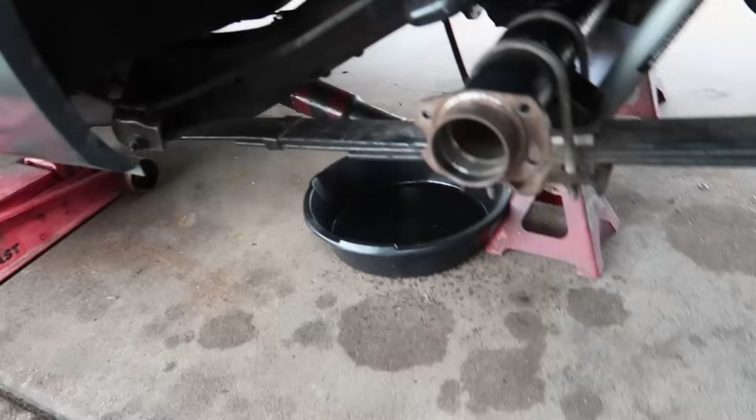In the last video we got this rear end bolted up in here temporarily, because we do still need to assemble it, but this is the reason why. I want the suspension compressed. So these are the shocks we're gonna be running, and this is the bracket we're running. I now have the axles sitting on jack stands, so the weight of the vehicle is actually being supported by the leaf springs and the rear end, just to make sure we get accurate measurements here.

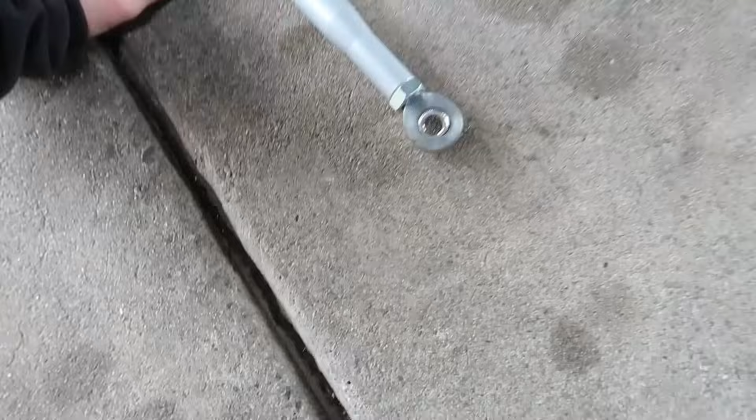So I've actually got a couple of traction bars here. These are from Max Speeding Rods, bro. They're actually for an EG Civic, but they're getting repurposed. So we need to make our brackets to go to the bottom of the U-bolt bracket here, and then it's got to span up to a bracket we need to fabricate that's going to bolt onto the leaf spring itself. I have less than $90 worth of material here.

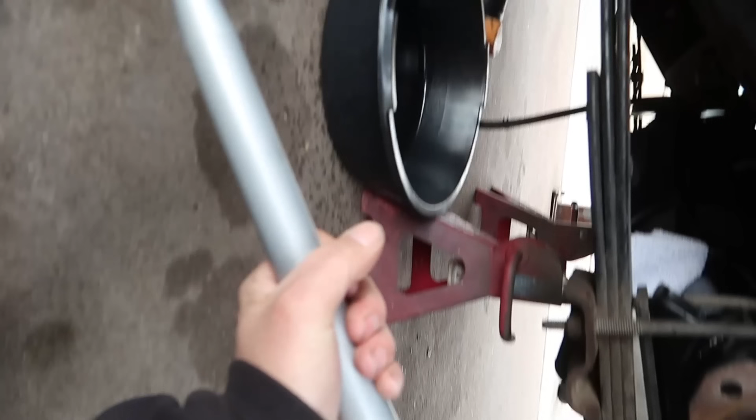Of course, I didn't have to purchase these because I actually had these guys sitting on the shelf. If I did have to purchase this, it would be just slightly over $100. So we've got a lot of fabricating, measuring, cutting, welding, and stuff to do. My main focus at the moment is I want to get that bracket fabricated. What do you guys think of my drawing, man? It's not too bad, huh? The whiteboard in the garage is most certainly a dope idea, one of the better ideas I've had in a long time.

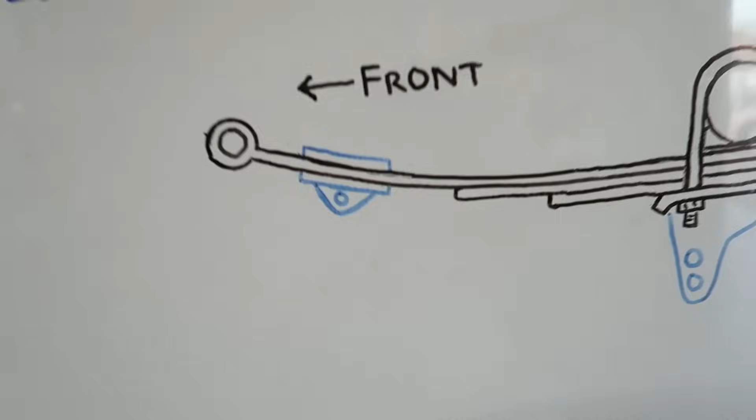All right, so first thing I'm gonna work on is kind of a simple portion. We're gonna start off easy. I'm going to erase this section right here. So the only thing we need to make are two plates that are going to stack on the top and on the bottom of the leaf spring, sandwiching the leaf spring in between it. We need to cut 4 pieces of metal and drill a bunch of holes, but in order to do so, we gotta do a whole bunch of measuring.

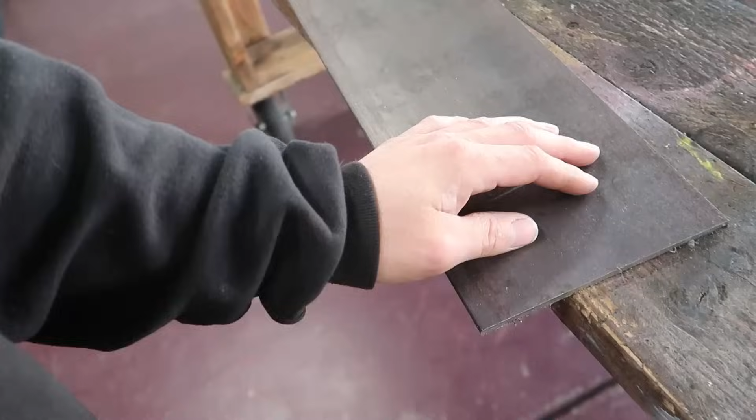So for this, we're gonna be using 6-inch flat bar. This is 6 inches wide and it is a quarter of an inch thick, solid steel. First cut! Nice, now only 3 more. Whoa, god damn it, that was hot. There's our first pieces cut.

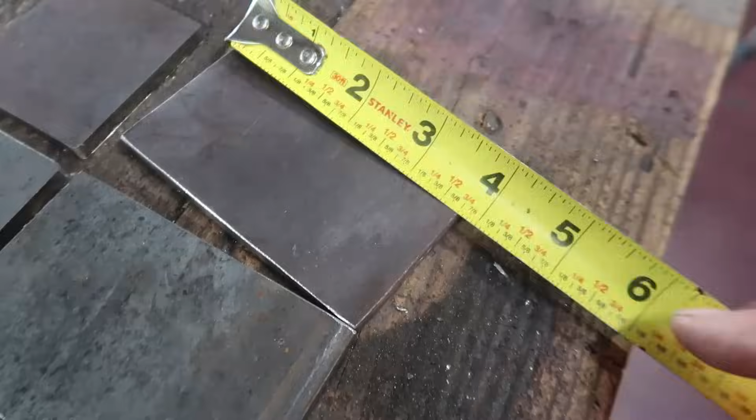These are 2.5 inches wide. I made them the same width as the leaf spring, no reason why, I just wanted to. So 2.5 by 3 3/4. Since I cut this the same width as the leaf spring, it'll make a really good representation. Oh my God, I almost dropped it on my toe. It'll make a really good representation of a leaf spring up here. So this is the same width as the leaf spring.

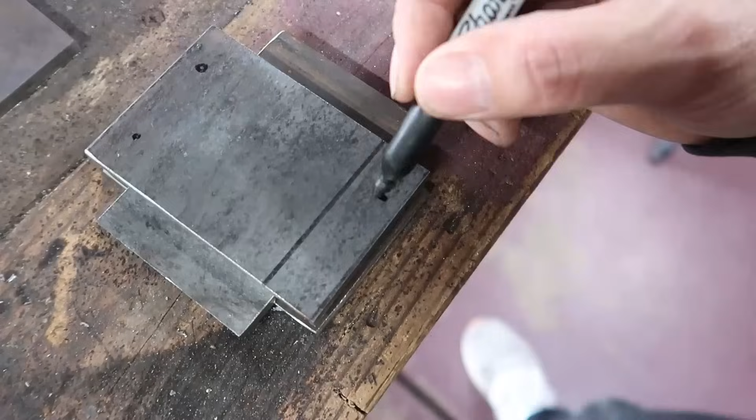These are going to sandwich onto the leaf spring like this, and we need to put 4 bolts through it. So 1, 2, 3, 4, just like so. So that's what I need to do next, figure out exactly where to drill my holes. I want to drill the holes so that when these bolts go through, they're right against that leaf spring. That'll limit the amount this is capable of moving side to side. If we get these holes nice and tight against the leaf spring, that'll add a little more rigidity so this thing isn't wandering around, because you don't want it to wander.

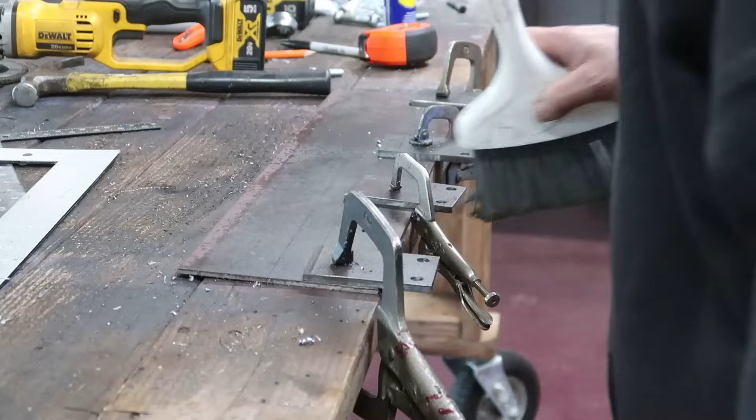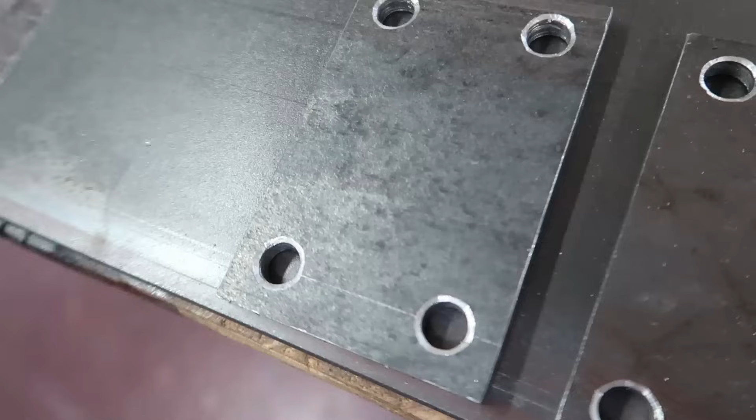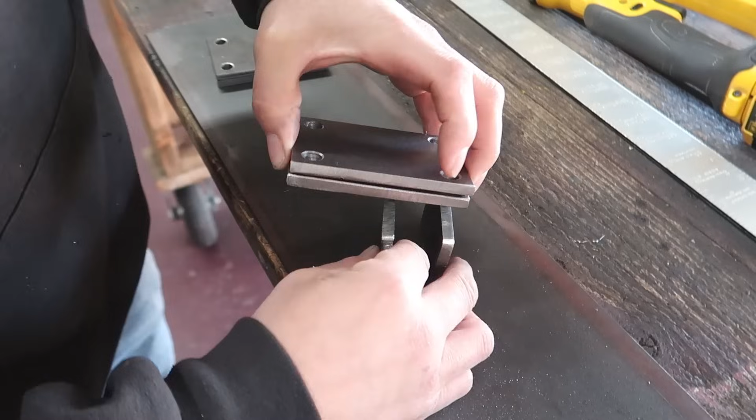Alright, so the top and the bottom portion of this bracket is now completed. We need to work on the part that's going to come down like this, and it's going to have a hole in it. This is going to be a pivoting point. So one of these is going to go on the top of the leaf spring, one's going to go on the bottom, and then they're going to bolt together. On the bottom portion we're going to need a bracket, something like this, that the next bracket we make is going to have to fit inside of, and it has to pivot.

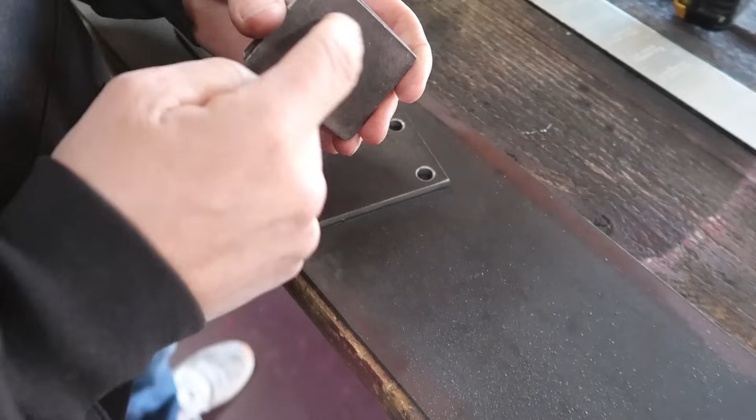So basically like that. We got to get these pieces trimmed, we got to drill holes, and we got to get them welded on here in the correct distance apart.

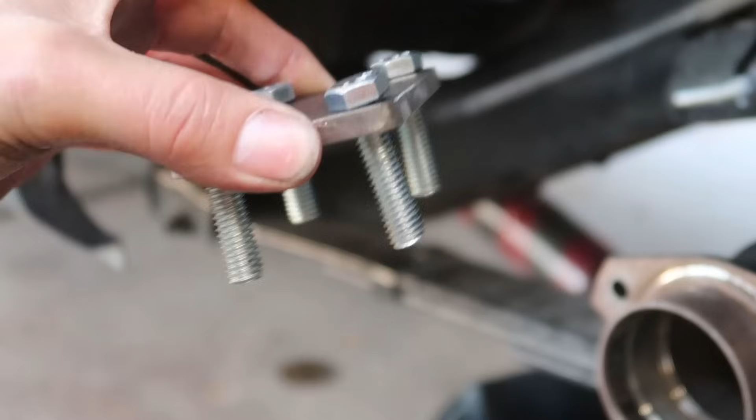Well, there it is, man. Our first brackets are done. This is the easiest of the 3 brackets that we have to fabricate here.

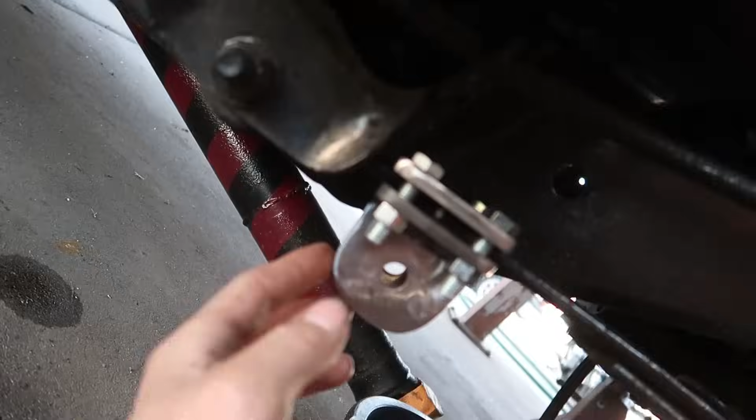So I want to mention before somebody puts it in the comments, I do have grade 8 hardware. It's these zinc coated ones right here, and I also have nylon locking nuts that's going to go on there, as well as whenever we get this all finalized, I'm going to go ahead and cut the extra threads off.

This is basically just mock-up hardware, but now we've actually got to get the Blazer all jacked up and supported by the frame once again, because now I need to pull these brackets out. And yes, I know, the ones that we just installed, but that's the reason why. I wanted to make sure to get them in so I can pull some measurements and everything.

I had to make sure that these bars were going to be long enough and the placement that we need to put the holes. Since we got that all mocked up, that made it to where I was capable of figuring out exactly where I needed to place this lower bracket.

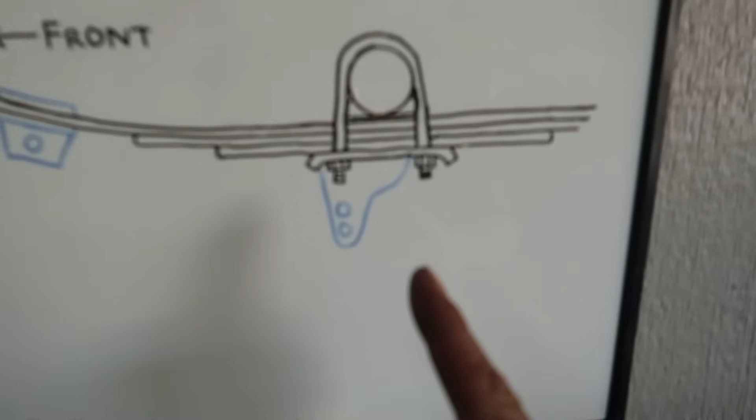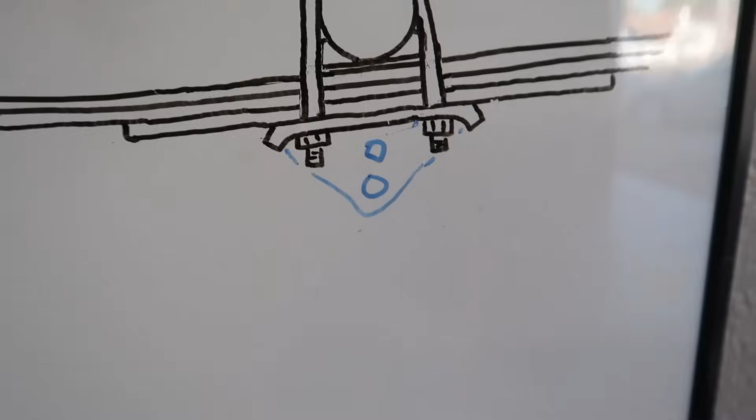So I wasn't sure if I wanted the holes to be like kind of where I have them drawn on this picture, or if I wanted it to be something a little bit more like that, to where the holes would have been more centered.

It really doesn't matter where it is you have the holes. Either way, it's going to do the same exact thing, but given the length of the bar is the reason why I think I'm gonna need to do something a little bit more like what I originally had drawn, so the holes are moved a little bit more closer to the front.

All right, pulling some really quick measurements. We need to bring this bracket down as far as we possibly can, but you also run into a problem. You cannot go outside of your scrub line.

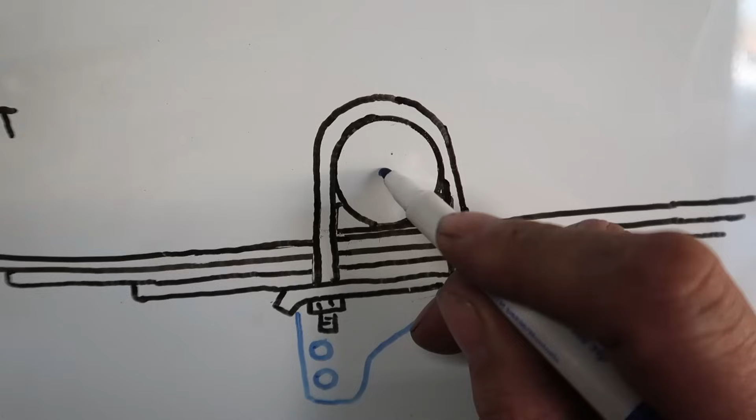So your scrub line, this is the center point of your wheel whenever your wheel is attached on here. So let's just draw kind of a dotted line representing a wheel, right? I'm gonna fill that in a little bit more so you can see it. So that's your tire. Let's say this is the actual wheel.

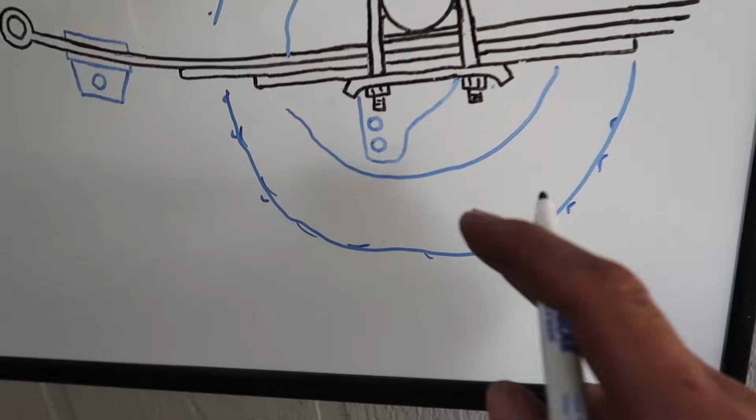If you have a flat tire, you were to lose your air pressure, you don't want this bracket to be hanging down anything lower than the edge of your wheel. So if you were to have a blowout and then all of a sudden that bracket touches the ground, that's extremely dangerous, because it'd be kind of like hitting the brakes on one side, or it could potentially rip your entire rear end out.

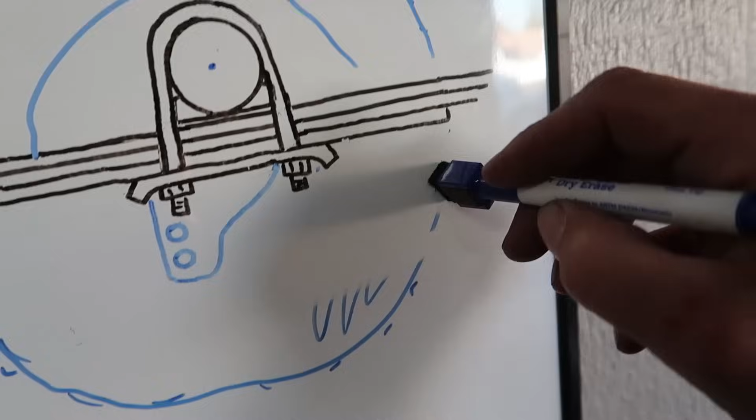A lot of times whenever you go to the track, tech will actually look underneath your vehicle. I would imagine it's mostly for rear wheel drive vehicles, and check and make sure that any traction bar that you have back there is not hanging lower than your scrub line, because it's a pretty serious thing.

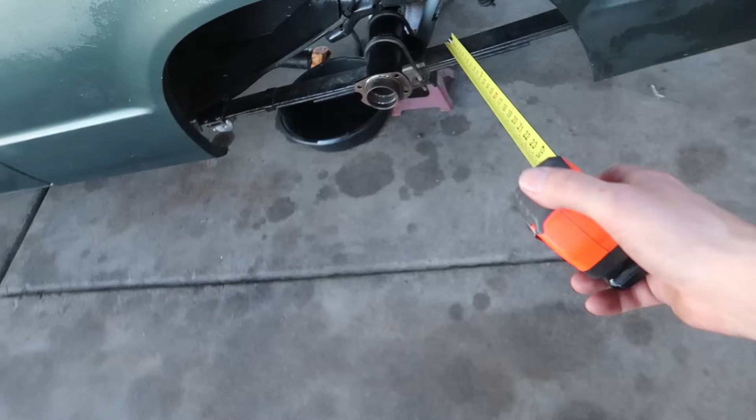So the wheels that I currently have on the Blazer are 15s. I don't ever plan on running anything larger or smaller than a 15 in the back, so I'm gonna go off of that measurement. And also, if you didn't know, if you have a 15-inch wheel, it actually measures out to be 16 inches in diameter.

So you put that on the edge on this side and you come over here, bam, look at that, we got 16s, man. But if you look at the tire, it's 15. If you didn't know that, you're welcome. Go out there and measure your wheels, bro. I bet you they are an inch bigger than what you thought.

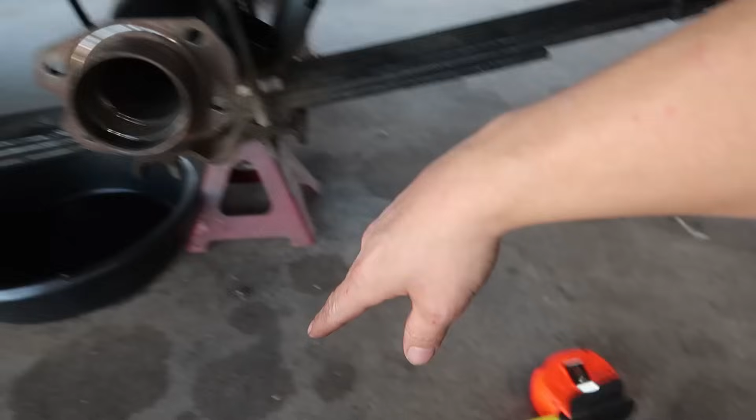I'm not gonna go over all this once again, but I did measure the diameter of the pipe. I cut it in half, minus that from my measurement, and then brought the tape measure down. Long story short, our bracket that's gotta hang down right here is capable of safely coming down 3 1/4 of an inch from this bottom edge right here.

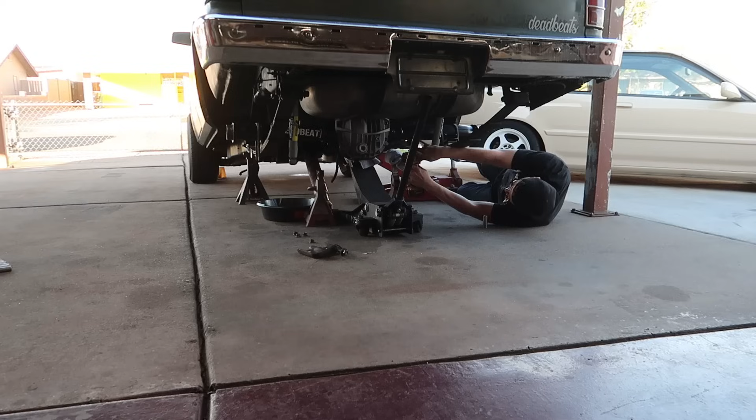So I went ahead and I got it sandblasted, took all the old paint and dirt and everything off of it, got it down to bare metal. I've already started trying to mark out the center of this.

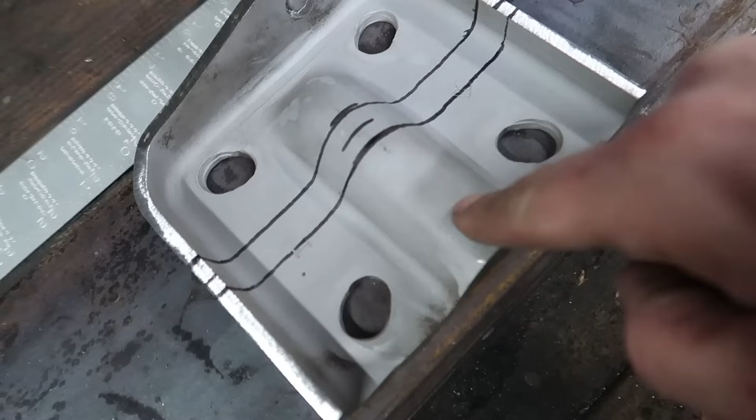So this is going to be the same concept as the bracket we already made. So basically this flat portion is the U-bolt bracket. Now we have to fabricate these 2 sections right here. Of course, they're going to be a lot larger, shaped differently, but it's the same concept. But the gap that's in between them needs to be 5/8 of an inch, which is this width right here.

So basically, the brackets that we're making right here is going to do what I have set up right here. It's going to go on each side of the heim joint.

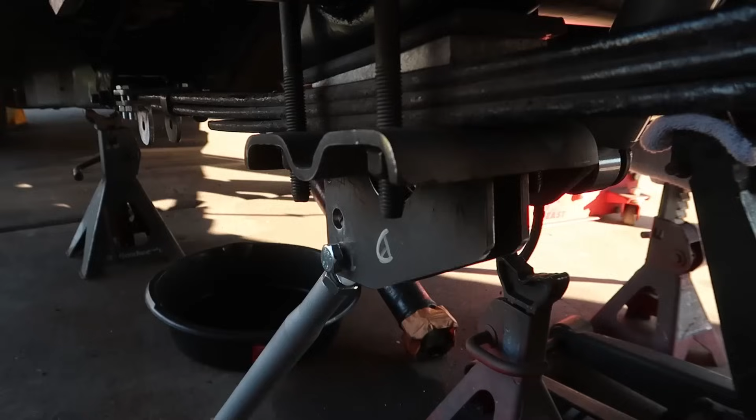U-bolt brackets are freaking done, man. Now we get to move on to what I think is probably gonna be the most difficult bracket we have to make.

It's gonna be the one that involves the most cutting, measuring, and drilling. So this right here is actually our pivoting point. Back here is where our bar connects to the rear axle. This is basically the control, I would call it.

I don't know, I'm trying to give this stuff names. So we got our control bracket done, we got our pivoting bracket done. Now we gotta get, what am I gonna call this? We gotta get the business bracket done? I don't freaking know, dude. I'm done giving names.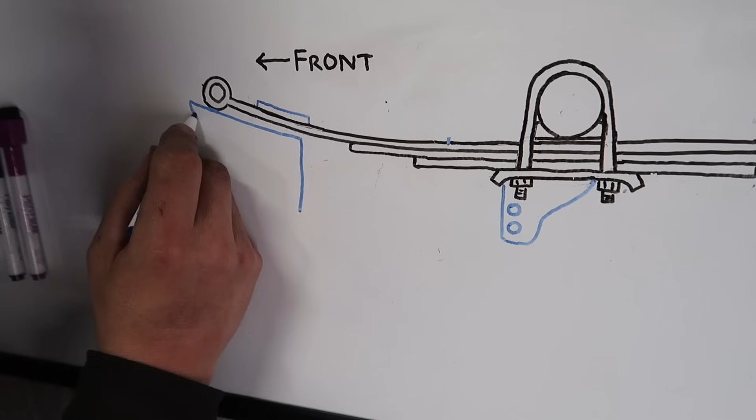I'm just gonna erase this to get it out of our way for the time being. You guys know what that bracket looks like. So now we need to make a portion that's going to extend up here to where the leaf spring bolts. This is going to run straight back to where our pivoting point is, and then come down into an L shape. We gotta make sure it's got enough girth to it to be nice and strong, something basically like this. So then there's going to be a hole right here, and our pivoting bracket is going to attach there at our hole.

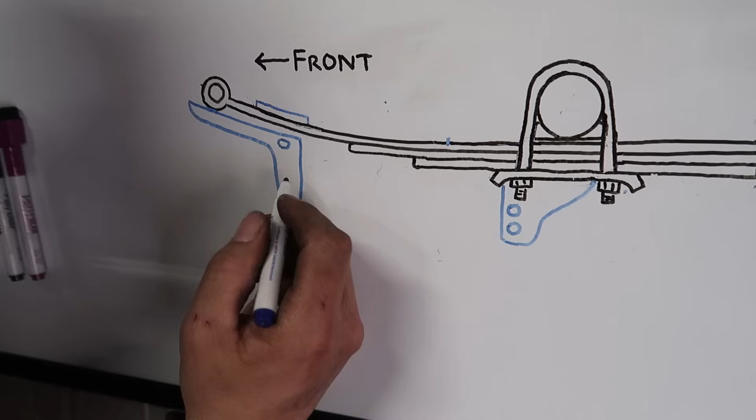And then down here we are going to add holes for our bar. That's where our bar is going to actually connect. So this is what makes everything happen. This is what makes the business happen, man. We're really close, and I'm not gonna lie, I'm really excited to get this done. So let's just freaking get right into it.

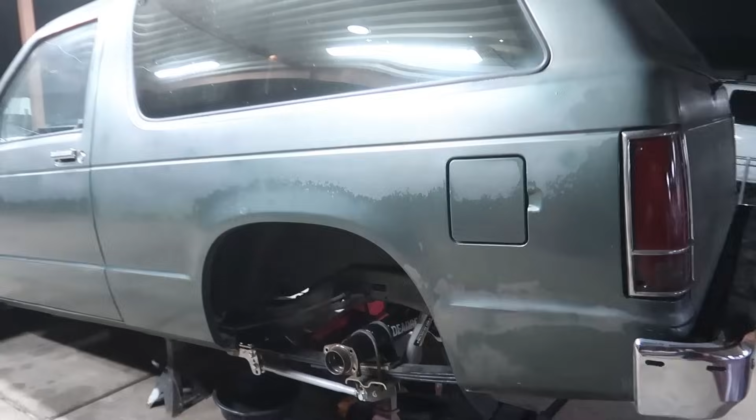Traction bars are freaking done, man. You guys want to know this, but this took me like 3 days to do. Between each bracket, cutting and measuring and all that crazy stuff, it takes time. If I had a water jet, I probably would have gotten this done in one day. But anyhow, they definitely came out dope.

For those of you who have been telling me to get a set of Caltracs, if you look at this, it's definitely a different design than what I've seen from Caltrac. I don't know if Calvert Racing, which is Caltrac for those who don't know, makes a traction bar similar to this style or not. The traditional Caltrac bars actually have the triangle and the bracket goes over here.

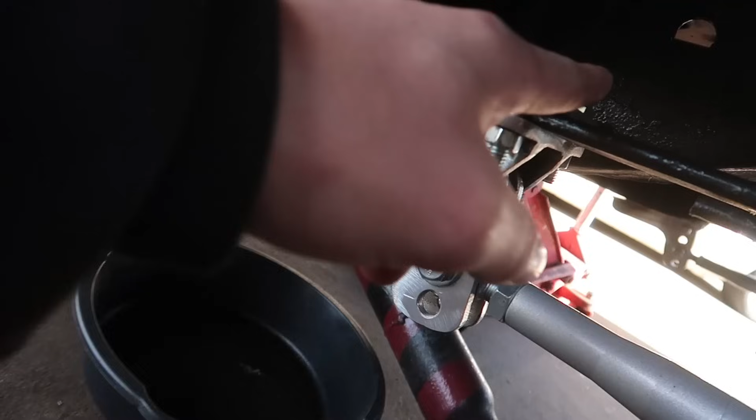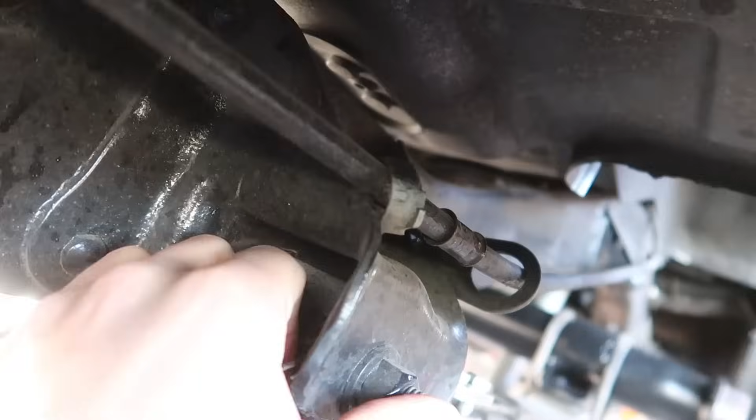Anyhow, I cannot fit that style bracket because it has to go on each side of the spring perch, or the mount for the leaf spring. So if you see on this side, it's wide open, I would be able to fit it. But where the Blazer is different, this bolt actually goes through the bracket on this side and then into the frame. So the other side of this mounting point for the leaf spring is completely boxed in by my frame.

As you can see, there's nowhere to put that other triangle. You gotta have one on both sides. Where if it was on a truck, it's completely different.

For a lot of you guys who are new to the channel, you probably don't even know that I have an S10 truck as well. You'd have to go back and check some of my older videos. I bought this as a running and driving truck, tore it all down with the idea of putting LS and everything into it, completely tore it down to the frame. We've resprayed the frame and everything. I'm not gonna get all into it. If you want to check that out, all the older videos are on my channel down below.

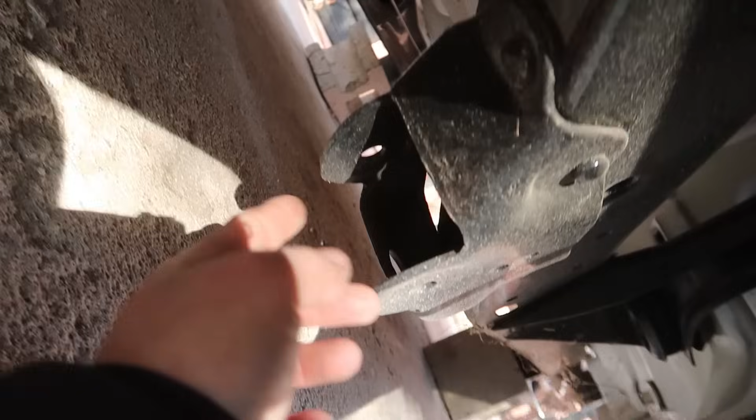So we will be picking back up on this thing in the future, but I want this to be like the all-out race truck. So if you come out here to the truck and look at its leaf spring mount, do you see how it's completely wide open? On both sides you can get that triangle shaped bracket where you cannot do that on the Blazer. And then also, this is a really flat surface. The Blazer's flares up at the front where I would have to cut that off.

I don't know, man, it was just obvious to me that the traditional style Caltrac bars was not going to fit on the Blazer. All right guys, I'm going to give you a brief explanation really quick of my take on wheel hop and how it is that this traction bar is going to actually improve not only the traction but eliminate wheel hop as well.

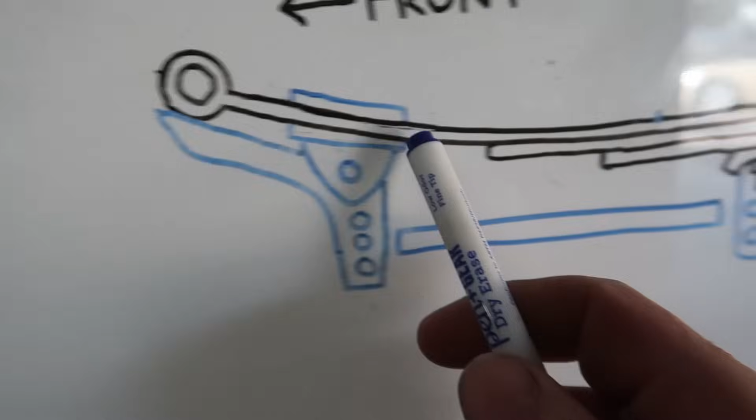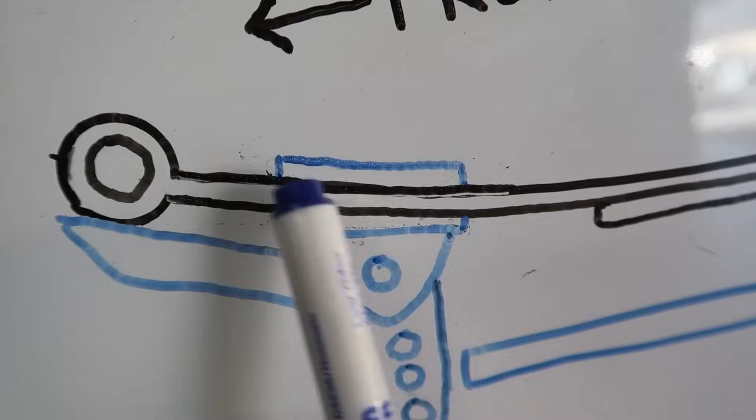So not paying attention to the traction bar at all, just look at the leaf spring that I actually have drawn up here. The section right here where that second leaf spring ends up until the center hole right here where it mounts, that single piece of leaf spring that comes up, that section right there actually will bend under load.

Whenever you're doing a burnout or try to take off fast, if your tire actually grips the road, what the axle wants to do is spin. The axle won't actually spin, but it will rock like this. When it does that, something has to give.

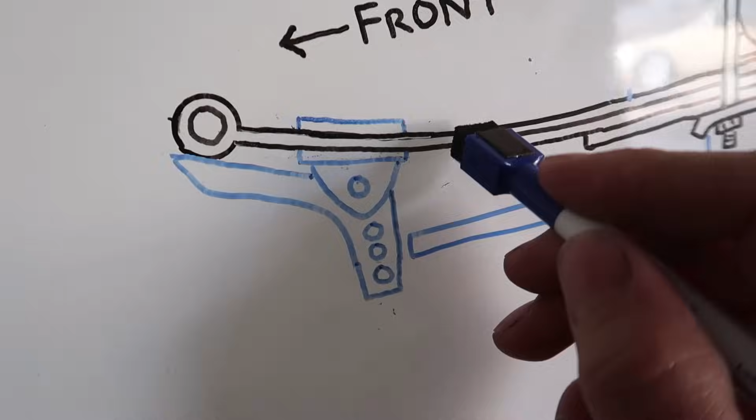It's this section of the leaf spring right here that gives. Let me do a crude drawing real quick - it will bend up like this, kind of aggressively. You'd be surprised how much that piece of metal actually flexes and moves.

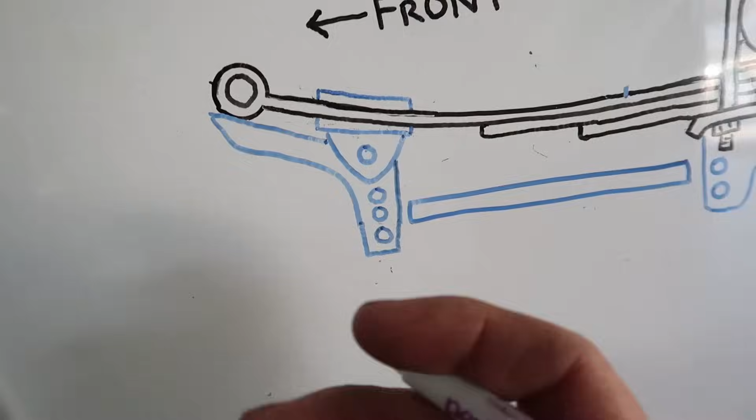So to stop the leaf spring from bending upwards and causing that axle wrap or wheel hop, whatever you want to call it, we need to apply pressure downwards on the leaf spring right here. That's where this whole traction bar comes into play.

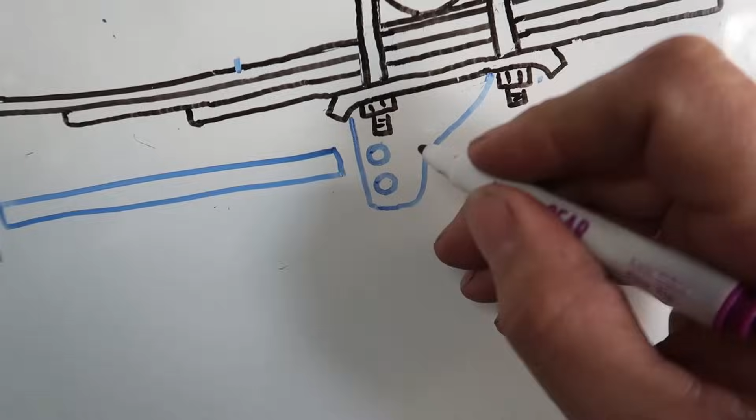Whenever you nail it, whenever you try to take off from the line or do a burnout, the axle tries to twist in this direction. When that happens, this bottom section is doing the same thing - it's trying to twist. So this bracket is going to move forward.

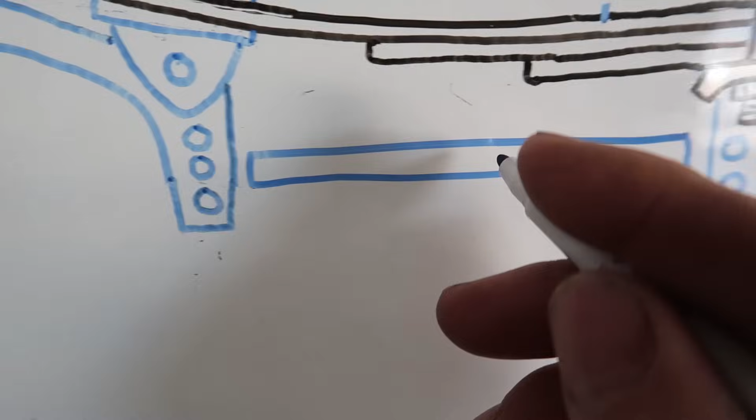Whenever this bracket moves forward, it's transferring that through the bar. So this whole bar and our cantilever, or this L-shaped bracket, all moves in this direction. When this moves forward, we have our pivoting point right here, which makes the L bracket push up.

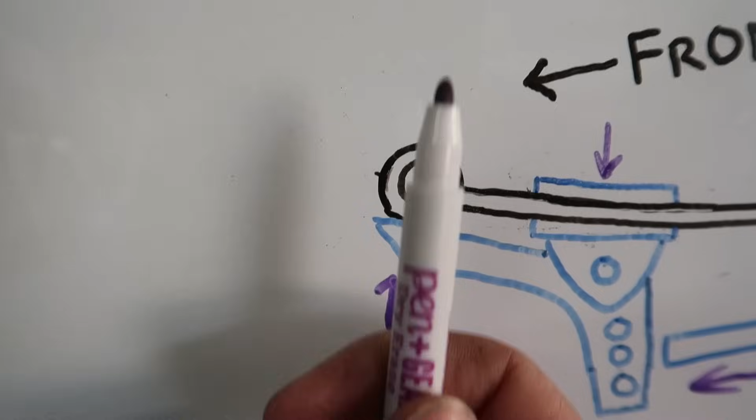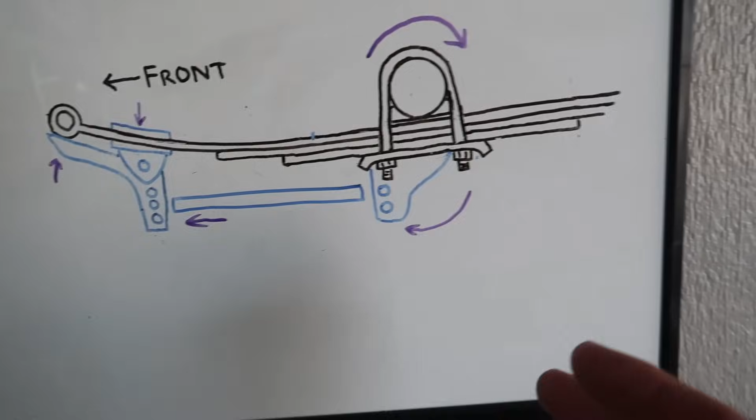Just to recap, man - I'm sitting inside of the Blazer at like 3,000 RPMs, I got a set of slicks on the back, I'm about ready to just let it eat. This axle is going to spin.

As soon as I pop that clutch out, the axle is gonna spin in this direction, pushing this bracket, pushing the bar forward, applying forward pressure on our L bracket, which applies upwards pressure where the leaf spring bolts up. In turn, that pulls down on this section, applying downwards pressure on the leaf spring so it's not capable of doing wheel hop.

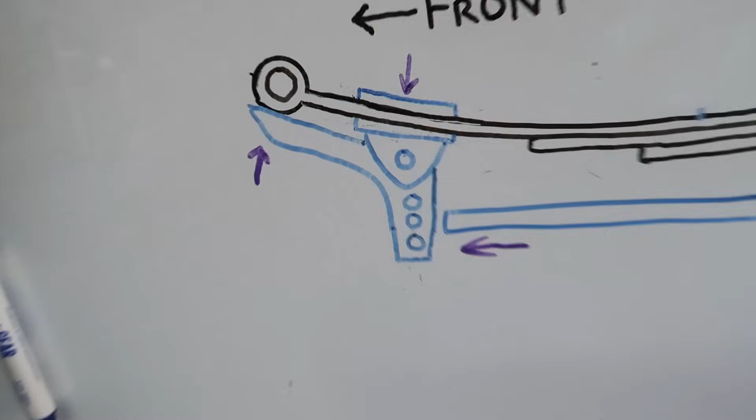As simple as that. I hope I explained that well enough for you guys to understand. I know I'm not the greatest at putting things into words, but that's my traction bar setup - that's how it came out.

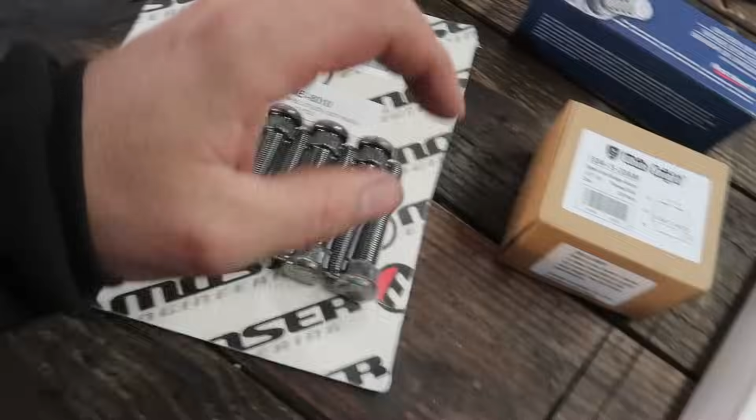That's it, open up all my boxes. I got gear oil, I got 2 new O2 sensors, I got lug nuts because I had to get new studs and they're bigger, and I got 2 new shocks for my rear end. Yay! But you're gonna have to wait to see what's inside of this box.

This is what's gonna make it all work. Get out of my way, get out of the way.